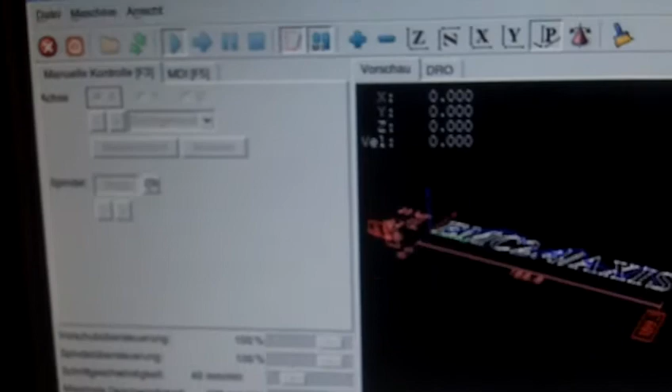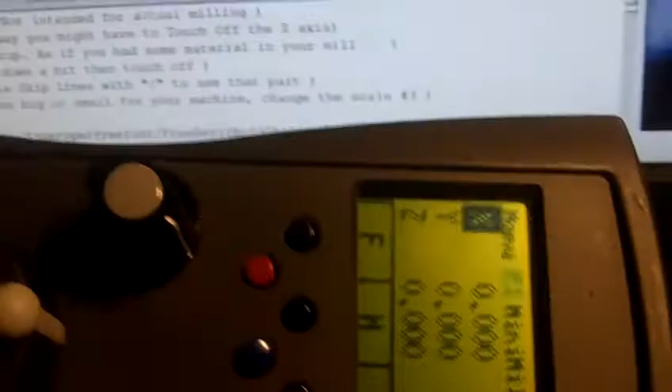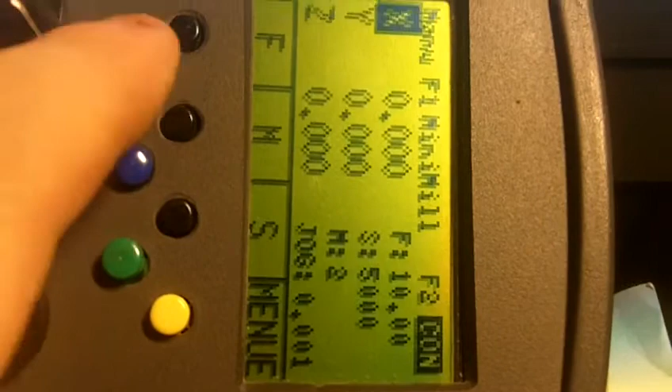Here's the standard screen, and if I press here, the machine is not selectable. So we go to manual mode. Here you see F1 is pressed. If I unhide this and press the machine, here it's also indicated. It works the other way too. I unpress this and press this, the red button here, machine, it's recognized, works that way.

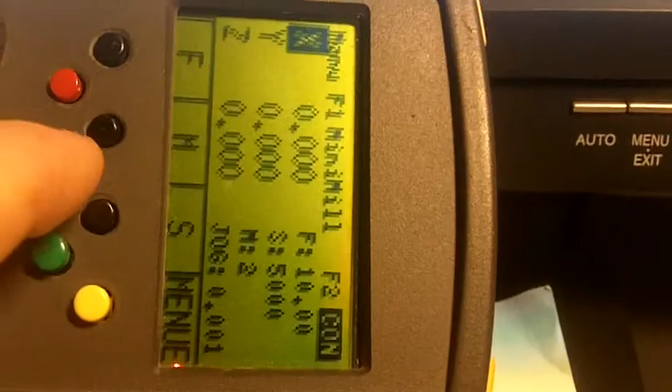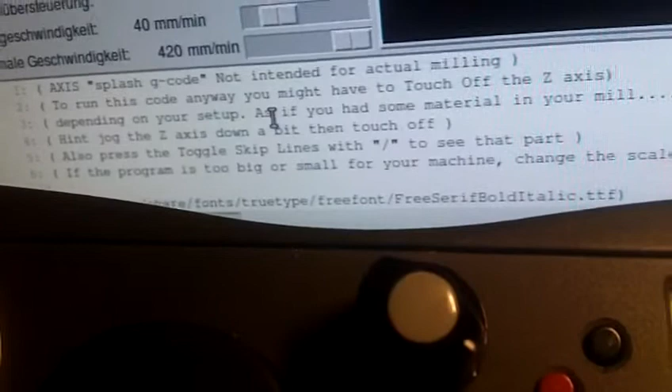Machine is on, and the most important thing here is always E-stop mode. E-stop mode, this works. Out of E-stop mode, you need to manually get the machine working.

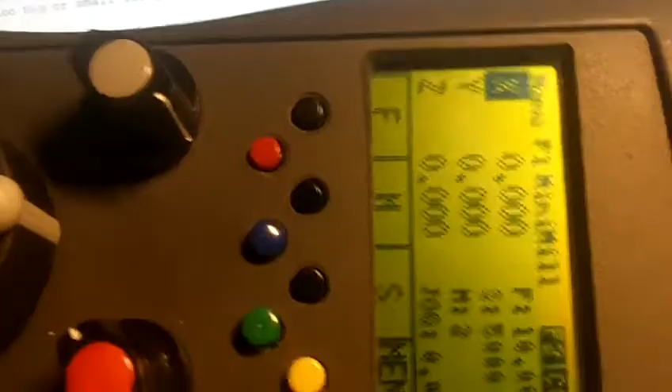So it's recognized here, you see the numbers are equal. If I jog here, let's jog here 40, it's also there.

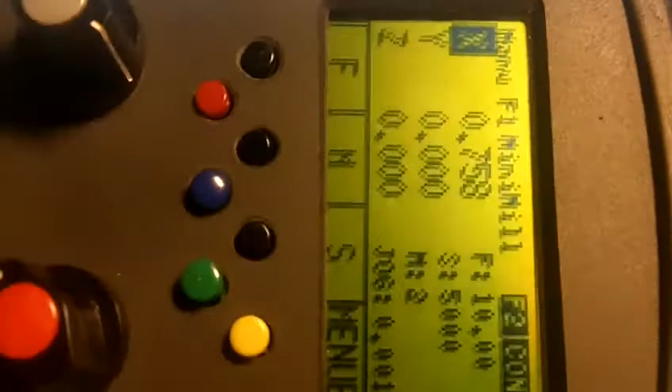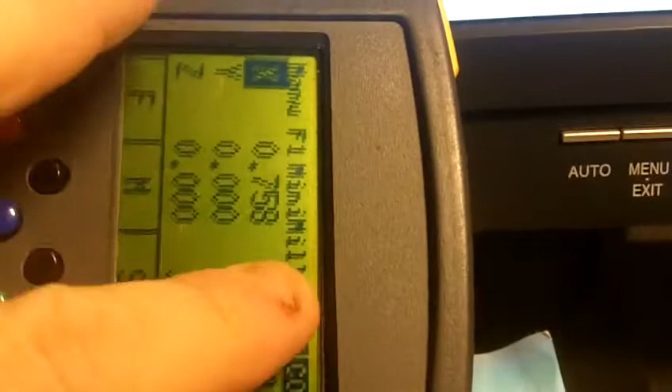Now we go for the white buttons. The white buttons are enabled by F1, here indicated. Now I can jog here around.

If I press this, it's difficult to show. I'm in the right mode. Yes, we jog X positive at 50. Here's the mode, here it's 50. Let's go a little up, 150. If I press the blue button, it goes up to maximum.

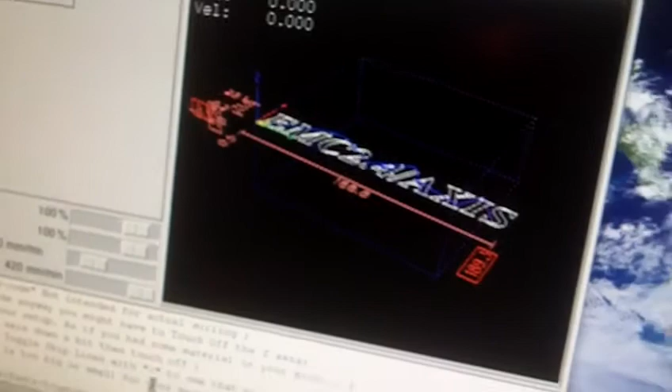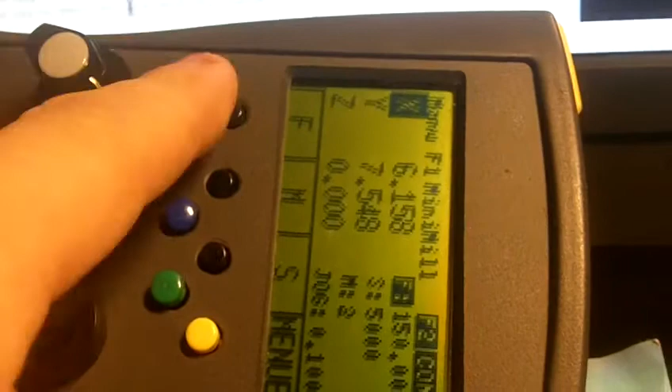Okay, this is working. So here the jog wheel is now not enabled. I cannot enable it as long as we are here in this mode. This can be programmed if you like.

I disable this. Now no move at all.

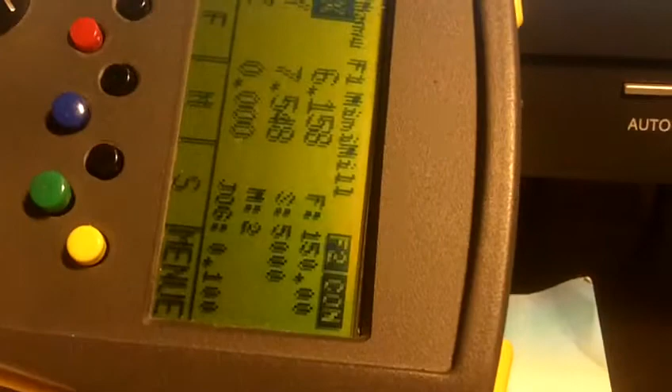So I now will enable. Here's the selection, 1 millimeter, 0.1. I will now enable this and move.

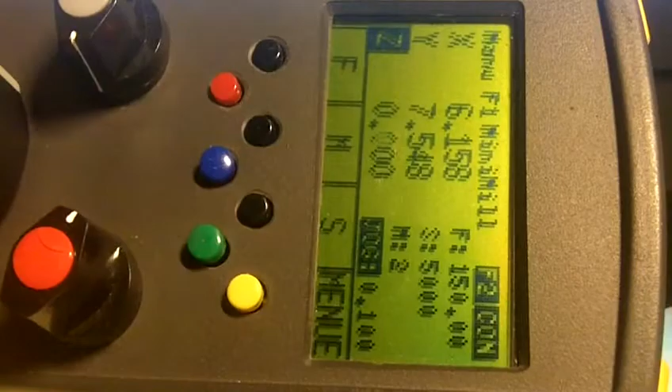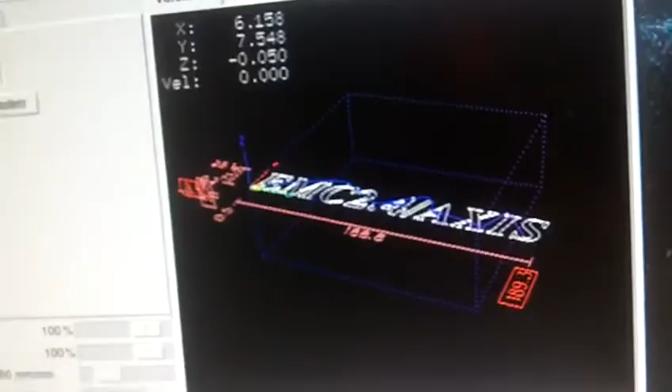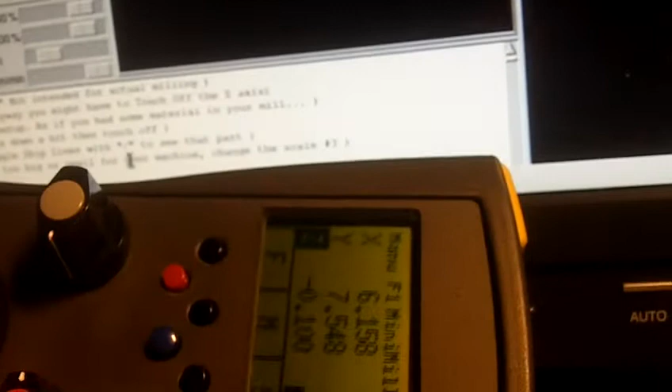If I go a little more, you can turn all the way around. See, it will stop. Only maybe 3 or 4 are recognized, the others are thrown away, for safety reasons of course.

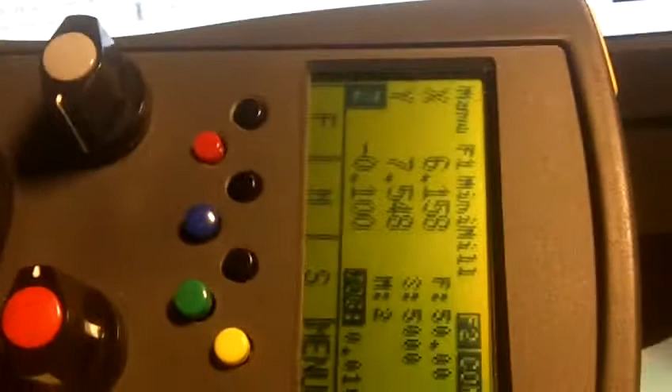Unhide this, and we are done.